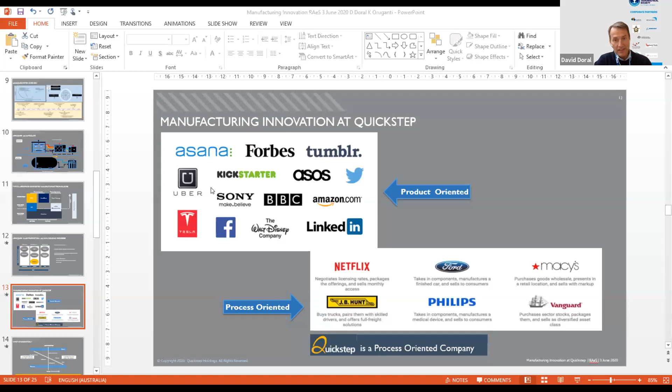And David, I think you're first cab off the rank, so over to you. Thank you very much for your introduction and for the chance to present to the audience today the work that Quickstep has been doing during the years, the kind of company that we are nowadays, and where we are heading into the future, and particularly our experience around manufacturing innovation.

As you've mentioned, Krishna and I work for Quickstep. I'm in a chief technical officer capacity, and he is a technical engineering manager. I oversee, as you well mentioned, David, the engineering team here in Bankstown, and also the R&D and technology development team in Geelong, in Victoria, where Krishna is based.

Just to give you a little bit of an introduction of what Quickstep is and what we do. We can move to the next slide, please.

Basically we're a composites company. We provide advanced composite solutions. Our core market right now is defense aerospace, mostly JSF and C-130. JSF probably has the lion's share of the work that we do.

We are also diversifying into commercial aerospace, and we have some presence in other sectors. We've done some things in the automotive sector. Lately we're doing things for other transport sectors like rail and even medical devices like portable X-ray systems.

The core of our activity is manufacturing, fabricating composite parts, typically carbon fiber parts, but we may do occasionally some glass fiber, and also assemblies. The typical assembly that we put together are the flaps for the C-130, which were transformed into carbon parts like 20 years ago.

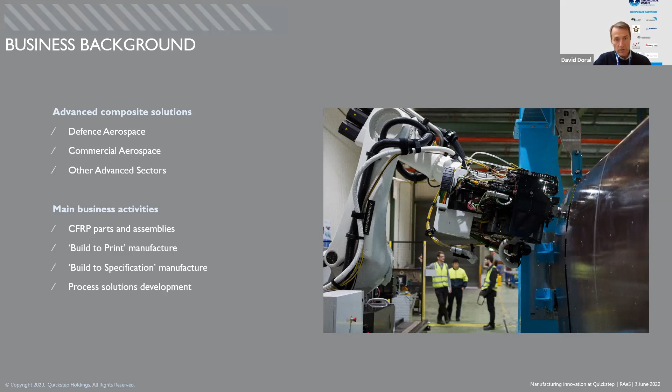We build to print, so basically we provide manufacturing services to first tiers and OEMs. Sometimes we can build to a specification, and we also have the ability and capability to develop new manufacturing processes. That's one of the areas we've been trying to work on more actively in the last few years, and where we think our innovation efforts are paying some returns.

In terms of the size and magnitude of what we do, the revenue for last financial year was over 70 million Australian dollars. This year that we're about to close will be higher than that. We're a publicly listed company.

We started almost 20 years ago as an R&D company with our own proprietary technology that we'll talk about in the next few slides. That was probably the focus initially, but we turned into a manufacturing business a few years ago. Again, the core of our activity, the one providing the returns and revenues, is mostly about producing parts for large military programs.

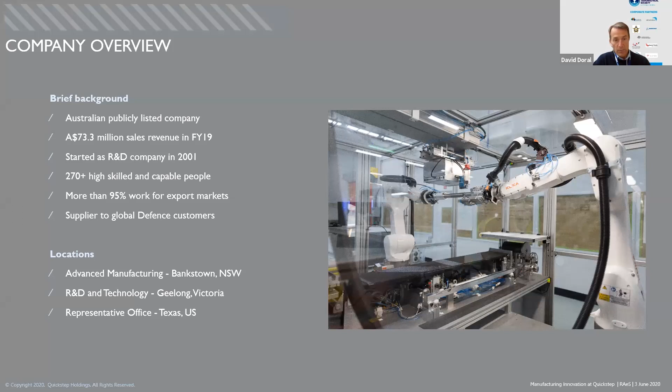We're a little bit over 270 people, mostly based here in Bankstown in Sydney, but also with a team in Geelong, as I mentioned before, and also a commercial office, commercial representation in the US, particularly in Texas.

So in a few words, what we do and what makes us special is particularly our advanced manufacturing capabilities. I guess that's an interesting mix of activities and technologies, because we're combining high technology - the latest composite manufacturing technology in terms of materials and automation - with a little bit of craftsmanship, simply because the type of work we do is not high volumes. We do many different parts, but not huge volumes, and we probably don't have as many opportunities for automation as you'd find in commercial aerospace, particularly with best sellers like the A320 or the 737.

They can do hundreds of aircraft per year. In our case, we may do hundreds and thousands of parts, but from a very different or diverse mix. So again, we're trying to combine the best of both worlds, and to do that we definitely need a highly skilled workforce, because there's a lot of knowledge and know-how required to provide the quality we supply to our customers. From that point of view, I guess we're very well renowned.

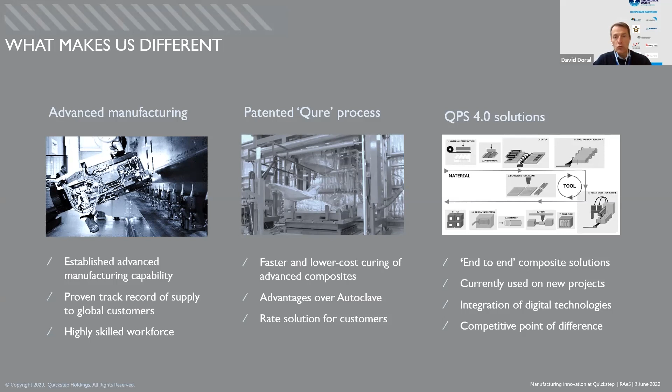But in the last few years, what we've been trying to do is apply that innovation culture to developing our own manufacturing processes, to automate some of those processes, to optimize them, and to come up with what we call our QPS 4.0 solution. That's also an interpretation of Industry 4.0 for our needs, with our own ethos and cultural approach to that trend.

Just a little bit about our plan. We've been growing significantly. We will grow again this year once that is closed. We have ambitious plans to keep growing.

It is true that we're relatively, I guess, protected in this current environment because we focus our activity in defense, and that is a sector that is not heavily hit by the pandemic, and yet there may be some effects.

Our key market is the US because our key programs are for American customers, as I mentioned before, JSF and C-130 Hercules. Defense is the core of our activity, but we're trying to get into commercial aerospace. One of the things I will try to do is maximize the benefits and the value proposition of our own technology, our AEROQURE technology, particularly trying to target more international markets.

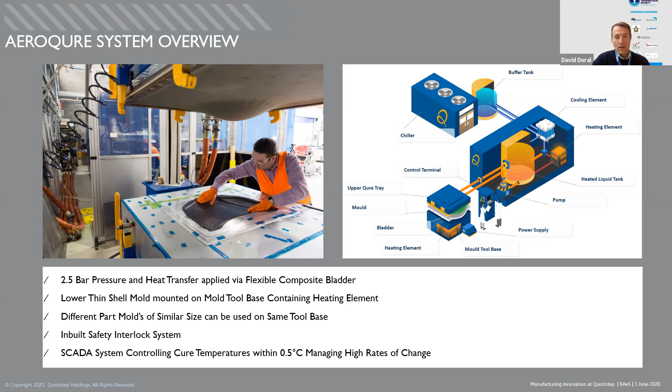And that's, I guess, the origin of the name of the company, Quickstep, because it was meant to provide the curing of that part in one step, in a very quick step.

And that basically allows you to reduce the curing cycle, again in a very controlled manner, for instance controlling any exothermal reactions, compared to an autoclave where typically you see long periods of ramp up in order to increase temperature and pressure accordingly, and make sure that all the air is removed out of the laminate, while allowing enough time to cure the material properly.

So we do all of that, but again in a very compressed time. And we do it thanks to the heat and pressure transfer applied by the medium, that is in this case this fluid, and through that bladder, that silicone bladder, allows us to apply both temperature and pressure.

We do it also with a heat exchanger. So part of the technology is being able to control that rapid heating and cooling of the fluid with a heat exchanger that is automatically controlled by a SCADA system, very precisely and very rapidly.

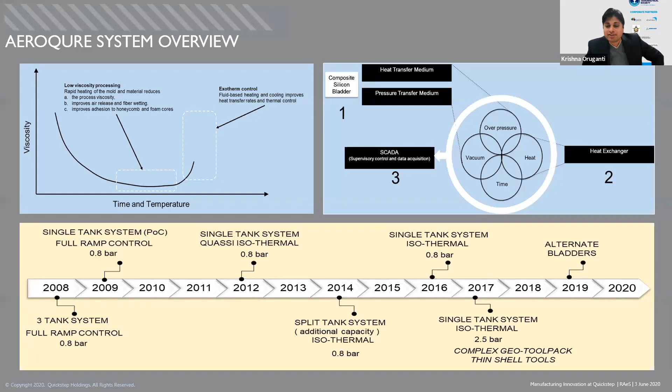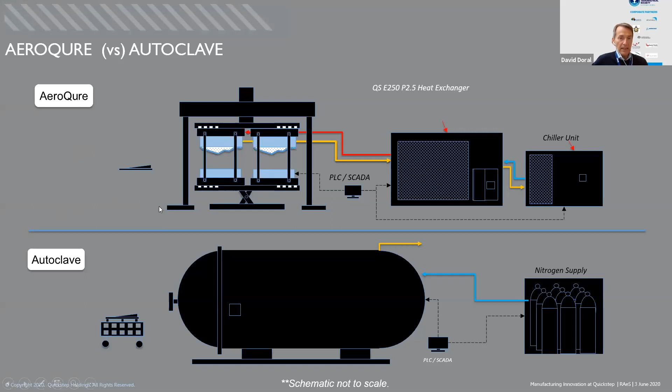Next slide, please. Trying to explain where we sit in terms of technology and what AEROQURE is compared to other curing technologies - if we divide curing technologies very generally between open mold and closed mold, we would be at the top together with press forming and RTM.

We typically see in aerospace open mold technology, so mostly autoclave. That has been the technology of choice, the conventional technology, and the one that is mature and that we can see in basically every single aircraft that is flying, to some extent.

In the last few years, companies have tried, or big OEMs, large aerospace manufacturers, are trying to move into out-of-autoclave technologies, simply because they probably allow higher rates and more flexibility. We're starting to see in Europe and other places liquid resin infusion, and there are already a few very relevant parts flying done with liquid resin infusion.

Yet, what we think is that the high rates aerospace is going to need in the future, particularly for single aisles, will be provided by closed mold technologies. RTM could be one of them - we actually have our own experience with that, and Krishna will be speaking about a use case based on RTM.

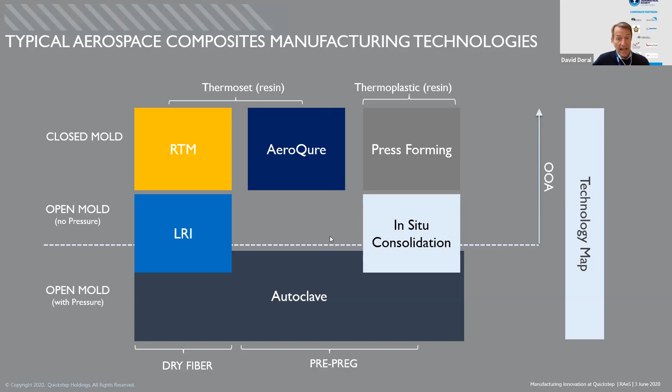But yeah, we think AEROQURE is going to have a bright future, particularly here, and probably in the next slide we can see how that is going to happen. So if in this diagram we see how those technologies are placed.

We see that AEROQURE could be in the sweet spot in terms of volume and cost. In terms of volume, obviously we won't be able to reach huge production rates over tens of thousands that you'd see with high pressure RTM and more conventional compression molding used in other sectors. But definitely we are way faster than typical autoclave technology.

Our numbers, our original initial tests, and all the work we're doing suggest that we can definitely go over hundreds of parts per year. We think we will be very comfortable reaching production rates of thousands of units per annum, all done with very contained manufacturing costs, definitely lower than autoclave, and again, meeting the mechanical performance that you require, that you demand from aerospace applications.

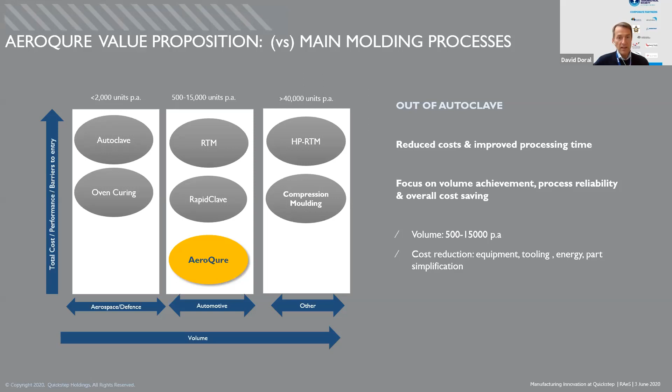Thanks, David. So a lot of that information that David just presented is the backbone of Quickstep's innovation pillar. We are an innovative company, but in order to understand innovation in general, there are two aspects that you need to think about.

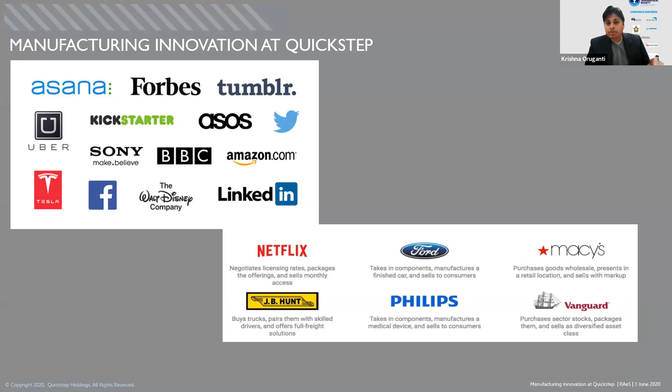On the screen you see a number of organizations. The key difference between the top and bottom is companies such as Sony, Amazon, LinkedIn, or Tesla. They're all product-oriented or service-oriented companies. The primary focus is on a particular product and the skills, knowledge and systems that go into delivering that particular service or supporting the delivery of that product.

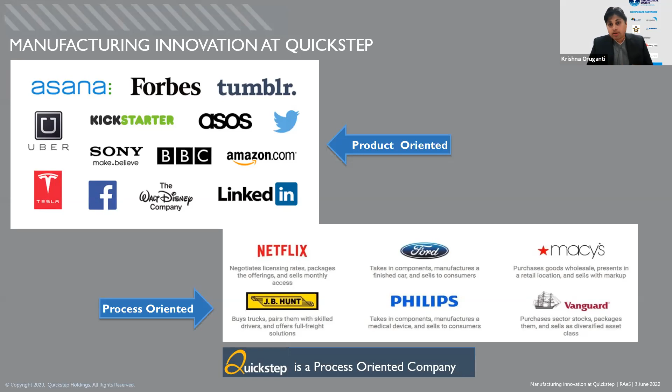Whereas the companies at the bottom, like Netflix, Philips, Vanguard, Ford, they're all process-oriented companies. Now while they do have a certain innovative product or offering, they don't focus a lot on those, but emphasize more on the processes that enable the delivery of that product successfully or effectively. Quickstep is a process-oriented company because implementing measures and taking corrective actions are paramount for an organization like Quickstep, an aerospace organization.

Now what is innovation? You can sum this up with an analogy we've commonly used in the organization: you take an unsolved problem, or a series of problems, and move towards a solution over a period of time. When you start, you have less structure, lots of unknowns, lots of ambiguous statements or assumptions in the mix. Over time you convert them into more structured, known, clear deliverables which form part of the solution. That means you're moving from disorder to order over a period of time.

The trick here is to understand the asymmetric nature of innovation. If you fail at the start, the stakes are low. But if you succeed, it's a flash of genius because expectations are low. Over time, as you carry forward that innovation, converting less structured, ambiguous thoughts into clearer ones, you're putting systems and processes in place, which means high expectations and success is expected toward the end of the journey. Failure there means the stakes are very high.

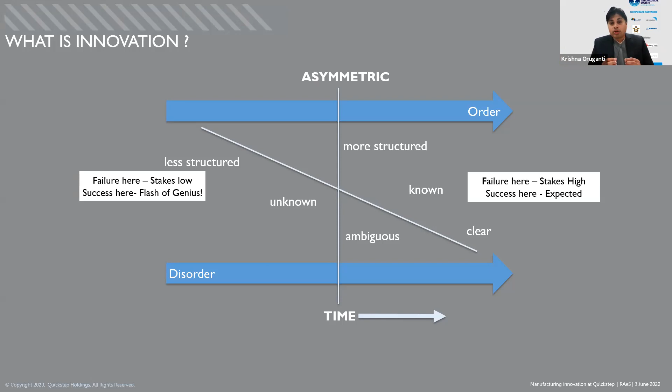So the trick is to understand the balance between disorder and order, and then learn to fail fast and move ahead. Innovation in this case is basically organizational creativity that converts unstructured unknowns into predictable outcomes, driving effective and efficient rates of success.

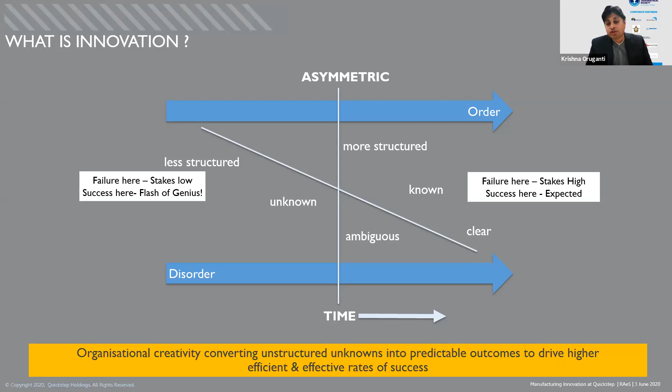This is something we use fundamentally within our organization. There are three other major pillars that hold this whole thing together and nurture it. For an efficient and effective innovation model, teams must be able to generate relevant ideas, select and align them with organizational strategy, and that's very key. The organization must have a clean, clear vision, which is then executed with a solid project management team. All of this working in parallel provides efficient and effective innovation.

Something that started within Quickstep was a journey I can talk about. Originally, as David mentioned, Quickstep started off as a technology company in 2001, focusing on out-of-autoclave technology for composite curing. A number of patents and innovative advanced manufacturing methods have been developed over time, but if you compare the success measures, or look at the drivers that have enabled those success measures, it would be all the different projects that have matured over a period of time.

So you can see here that small teams, incorporation of appropriate quality measurement systems, the philosophy of design thinking, and a technical bottom-up approach—these kinds of pillars have been embedded within the culture of the team here, transforming and maturing the technologies further to deliver these particular projects.

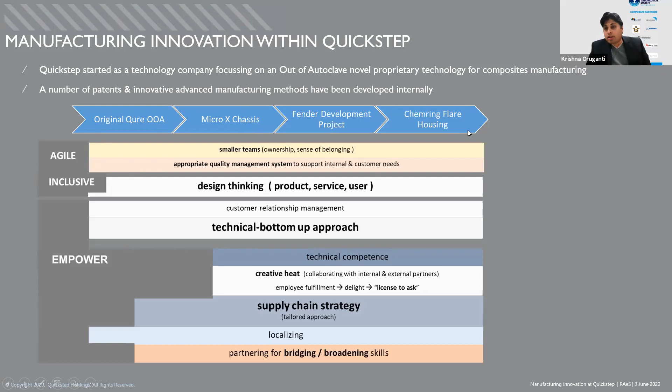The 6-segment approach, where we find a strong commitment and leadership.

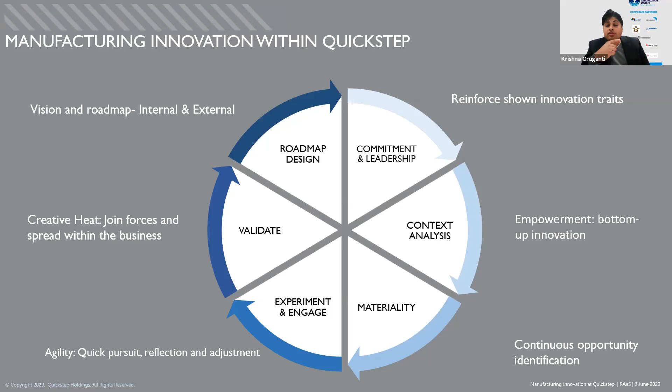That means joining forces and spreading the ideas and brainstorming them throughout the business, and incorporating all of these things back into the vision and roadmap for both internal as well as external. This is a continuous cycle that is looked at within Quickstep.

In terms of the technology roadmap, we've identified a number of focus areas, as you can see here.

Typically for any composite manufacturing company, the process you see on top goes from materials, converting those materials into usable shapes, or kitting, laying them up onto tools, and then curing them using heat, pressure, and time, followed by inspection, trimming, and painting, which are the downstream processes, are pretty standard.

In terms of Quickstep's technology focus areas, we are looking at each one of them individually, and then trying to do a value stream map to identify which ones will provide an effective value proposition to help meet the business goals and objectives.

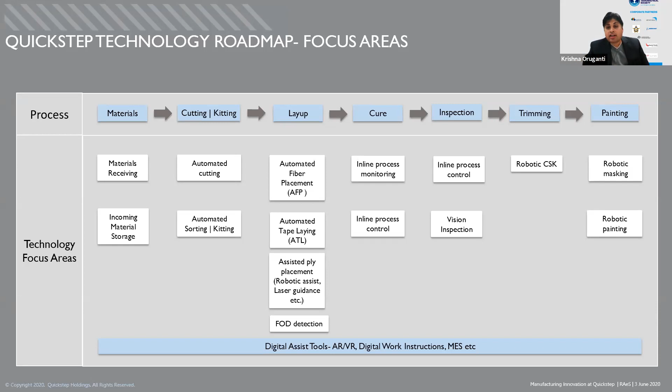The Industry 4.0, or QPS 4.0, is basically taking all of these things into a common bag, and then using digital tools in order to facilitate an effective solution, which is what we're actually trying to work on.

One such case study is the F-35 flare housing tube. It's a composite flare housing tube. This was originally designed as a build-to-print product, but later on it was provided to us, and we had another look at it. So this is where we did a bottoms-up approach.

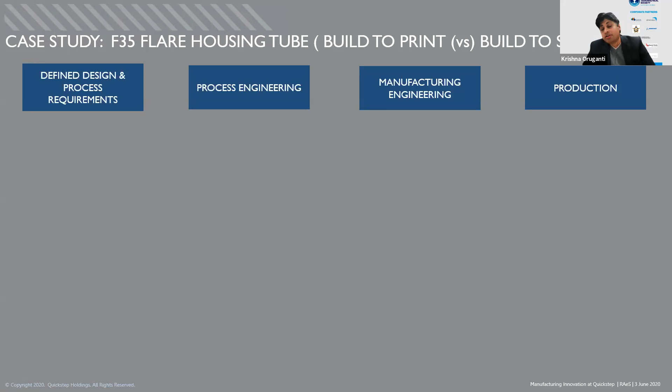Originally, we had the defined design and process requirements specified. Then that led into the process engineering, manufacturing engineering, and production engineering related sections.

The defined design and process requirements basically describe what needs to be made, or this is the technical drawing in question. The process engineering functions tell us what and how the product needs to be made. And the manufacturing and engineering deliverables dictate where it's made, who it's made with, and with what tools these particular products are made.

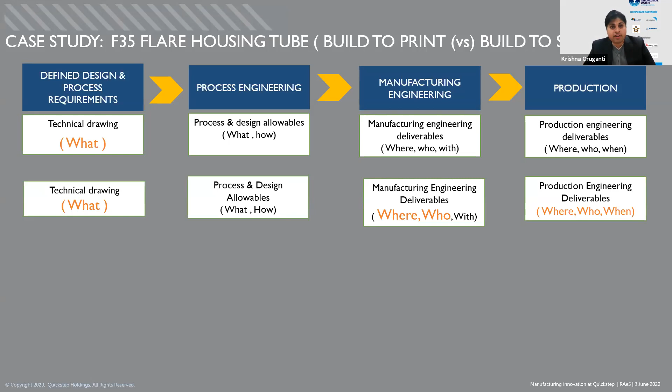So when we cascade these things across, the information provided to us was essentially a technical drawing. It said what needs to be made. In this case, it's a flare housing tube. But everything else was left a little bit open to us.

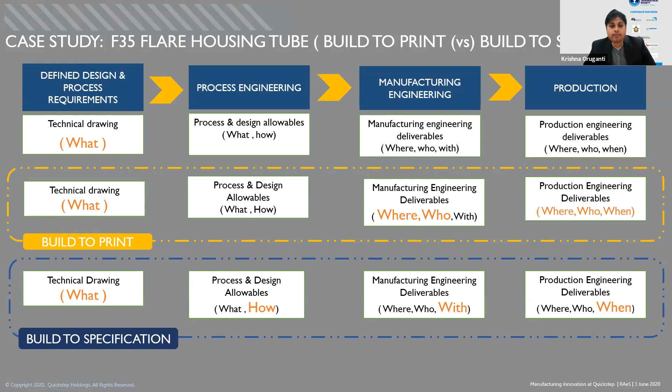So the key difference here, where we were dealing with this flare housing tube, is a build to specification, where what was given to us, how, with, and when, is what we actually chose to deliver the lowest cost possible or the most effective design. And we use technology as an enabler for doing this.

One key thing was to understand the critical design needs and deliverables. The starting step was obviously to understand what is involved, or to understand the technical drawing. So we analyzed the current design, and optimized it for cost and performance, and value.

And then we even looked at an initial business case to identify the key bottlenecks, labor requirements, and come up with a high-level macro process flow, which was used to run a simulation and then come up with a rapid prototype to prove the concept.

Now, this cycle is part of the continuous improvement cycle that you keep going in circles to identify those various points where you can fail fast. So the principle we adopted here was learn fast. If you have to fail, fail fast, but then apply the knowledge back into the business case to see what you can improve and then optimize.

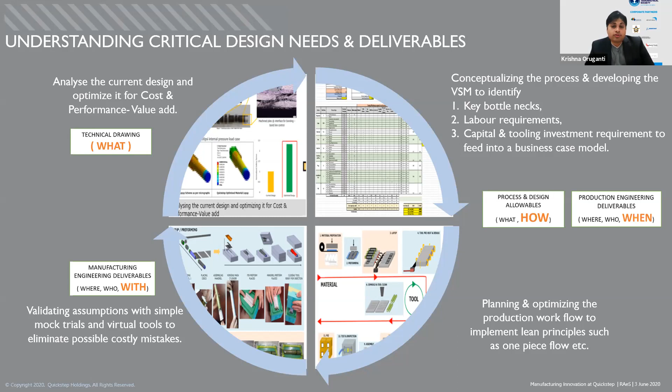So after a number of these cycles, we ended up with the basic outflow of how it needs to be done and what are the different tools these things need to be made with, and the associated cycle times, which will then provide the lowest cost possible.

Because cost was a major driver for us, we applied a commercial engineering model in order to optimize this particular design. And we integrated all of that using digital travelers.

Now, for those of you familiar with the aircraft industry, traceability is an underlying fundamental. The digital traveler is basically moving away from a paper-based sheet into a digital traveler, but more about trying to create that passport that can go across right from the source of the materials till the finished product in assembly, and trying to integrate all the services and processes to be aligned with this.

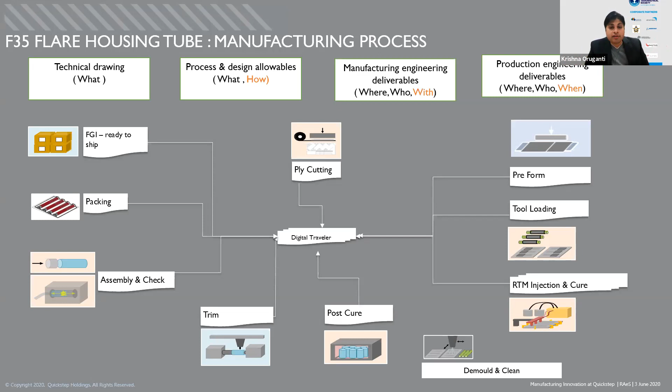So it's a subset of the Industry 4.0 initiative, but this is something that we embarked on with this particular project.

At a macro level, this is what it looks like. We have the systems on the right-hand side, such as the analytical systems like CAD and CAE, and the operating sections, such as standard operating procedures, curing parameters, or trimming programs, integrating all of those into the physical equipment, and then trying to control it through some sort of central database. In this case, it could be a SCADA system. So this was our vision.

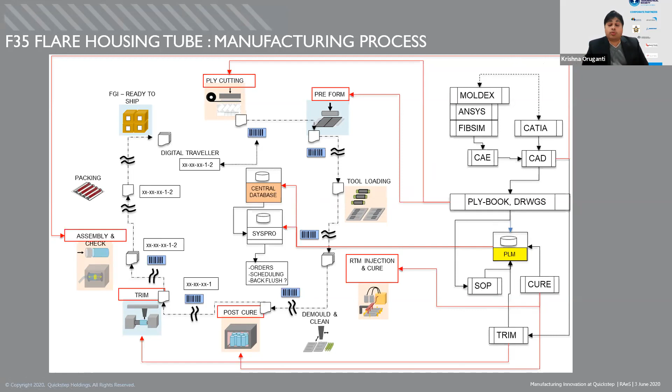When we originally started this, I'll take you through this slide. When we first started the concept for this particular process, there were a number of process steps to which we had a particular intent. We wanted to describe each of these process steps and ask, what do we really want to achieve out of each of these steps? What are the deliverables? What are the objectives? We looked at it from a bottoms-up approach.

When we first put the concept together, the maturity of the ideas was very, very low. I would say more than 95% of the elements were unknown to Quickstep. Quickstep originally only ever made products out of an autoclave or using infusion, but never in an RTM scenario. So introduction of an RTM technology, or an integrated RTM technology, to Quickstep was something new at that point in time.

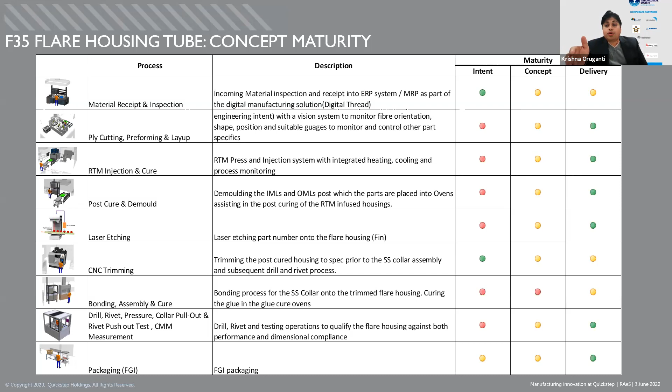As the program matured, there were a number of these deliverables that moved into a maturity phase at different rates, but more focusing on the fundamentals of commercial engineering, and then saying, okay, how do we actually drive the cost out and get the best value for money? Towards the end, where we are right now, this was basically an 18-month journey from intent till delivery, where we've matured probably more than 95% of the deliverables within the project.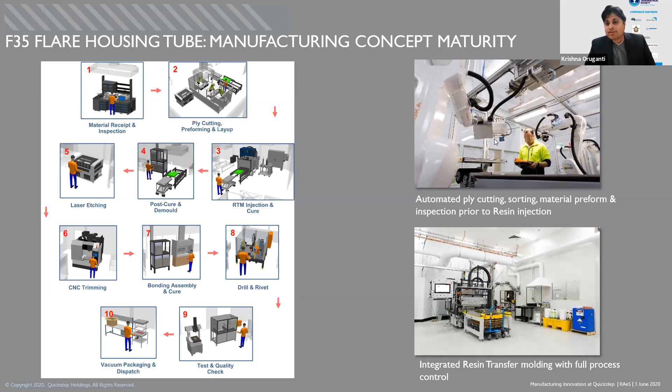So this is probably not a very easy question to answer. There's no straightforward thing to this. It really depends on multiple scenarios, but the key model is the believe, think, behave, and act model that kind of drives this. So if the team believes in a particular idea and they work through it, they need to be able to spread that, or provide enough data to build that credibility and buy the additional time required to keep that idea progressing to the next level.

Okay, our next question is from John. Have you employed Industry 4.0 throughout the factory example to legacy production lines with old equipment?

It's in the plan, I'll take that, David. We are working on that particular front. It is not a simple, straightforward solution. There are many intermediaries that need to be resolved. Older equipment comes with lots of legacy systems, which may or may not be compatible, but we are working on that right now.

Okay, another question from Sam. Are there any benefits to the qualities or properties of the final product material using your method instead of traditional autoclave methods?

I'll take that one. I would say that right now, what we're trying to do is match the mechanical performance and the typical qualities or required properties of any aerospace part. So what we're offering is a faster process, more economical. So in the end, yeah, beneficial for the OEM, for the integrator.